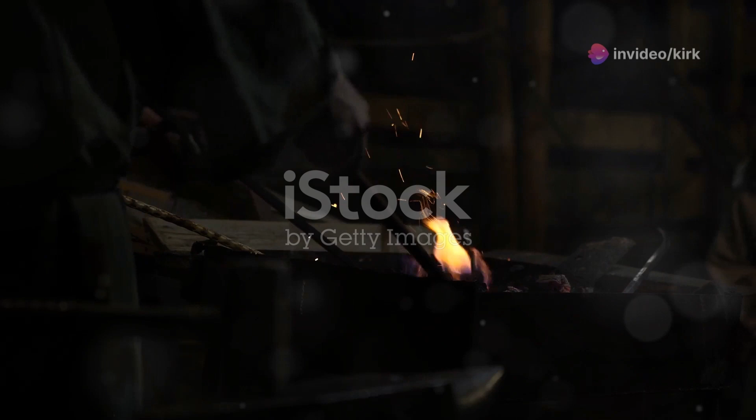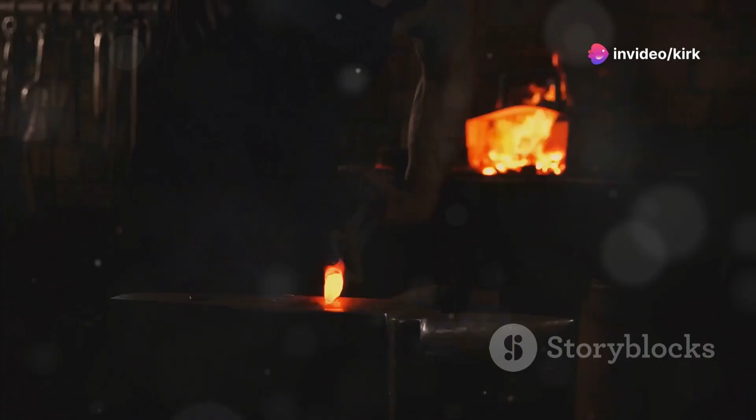Steel making has been pivotal for society as we know it today. It all started with the discovery of iron ore, which is a rock containing iron mixed with other minerals. During this time, there developed different ways to process the ore, typically involving high temperatures to melt and shape it into useful items.

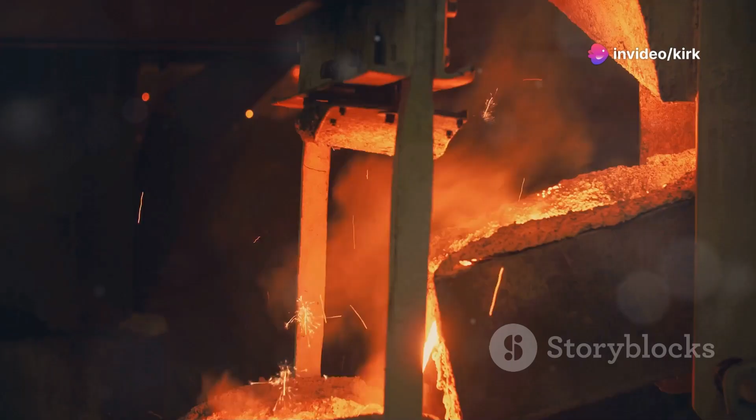The early forms of iron were hard and brittle. After experimentation and innovation, cultures learned that additives like carbon made iron a superior material known as steel. This was a game changer for the applications of steel.

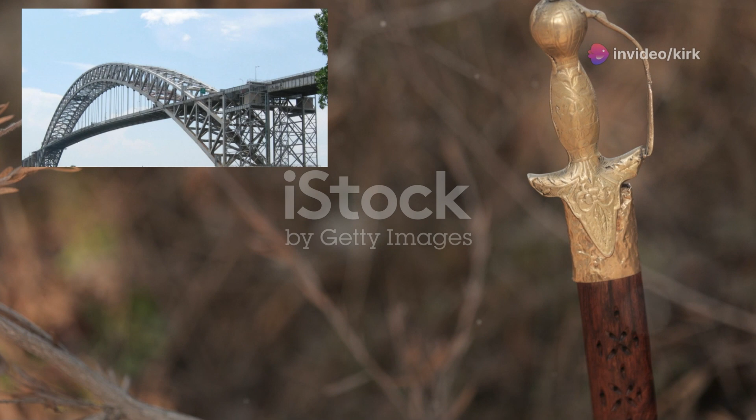Today, steel is one of the most used products around us. We use it for the majority of infrastructure around us, from railways, bridges, buildings, vehicles, and even military applications.

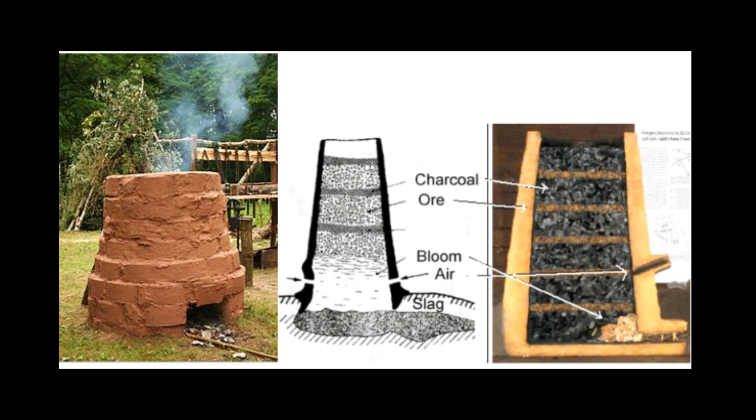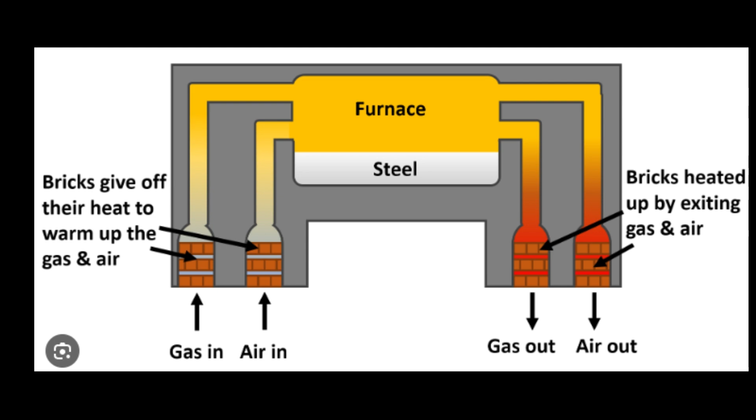Some of the techniques used to create steel were bloomeries, which used charcoal and iron ore in a chimney-like structure with heat; the Bessemer furnace, which was a similar process with more modernized equipment; and the open hearth furnace, which was more of a pit with air injected from below.

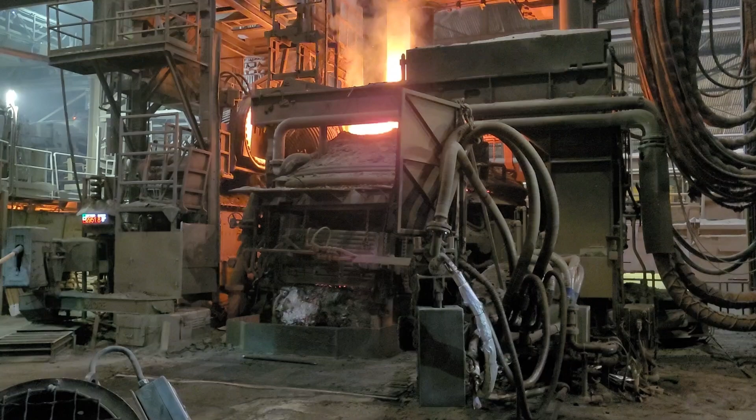The basic oxygen furnace is a big vessel with the ore and oxygen injected continuously. An electric arc furnace is what we use in present day. This technique uses mostly scrap, which is recycled and melted using electricity.

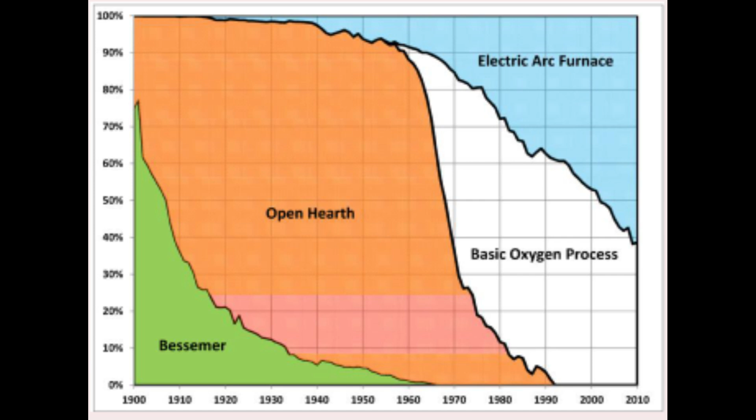Over the years, we see the techniques used to make steel have shifted as newer, more innovative techniques emerge. Today, the two main types are basic oxygen processes and the electric arc furnace. But there is always the need to improve steelmaking.

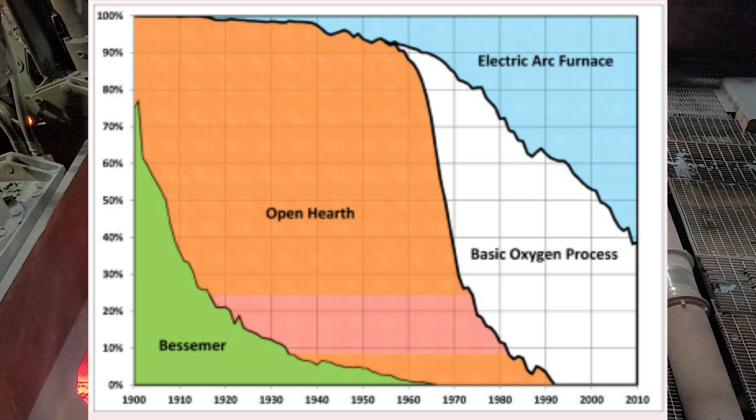The evolution of steelmaking has been driven by the need for higher efficiency, improved quality, and sustainable practices, leading to continuous innovations in furnace technology, process control, alloy development, and manufacturing methods.

The environmental aspect of these advancements must not be ignored. Steelmaking accounts for 9% of global greenhouse gas emissions. On top of this, 80 to 90% of the CO2 emissions from steelmaking come from the use of traditional blast furnaces.

In traditional steelmaking, iron ore is reduced in a blast furnace. The blast furnace takes an iron ore and uses carbon-based reductants like coal and coke to produce pig iron. This reaction also produces a lot of CO2.

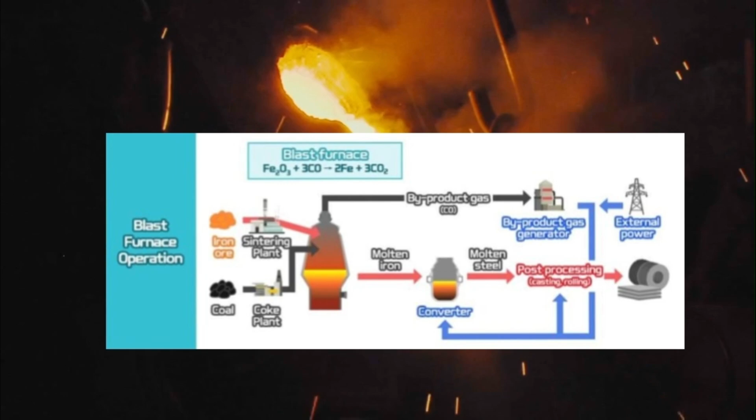Pig iron is then converted into crude steel in a basic oxygen furnace. Over 70% of the world's steel is produced using the blast furnace process.

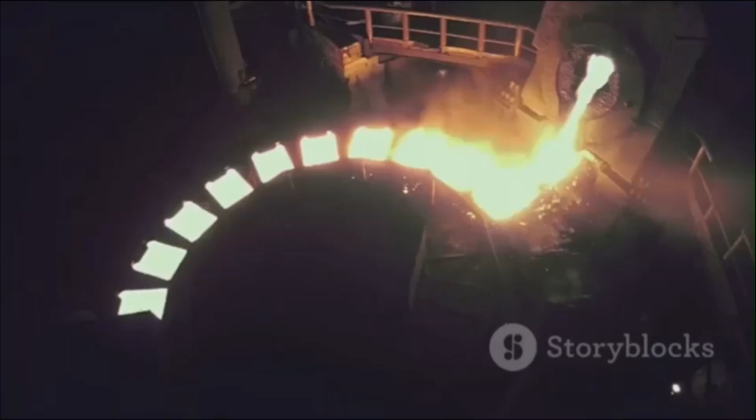Hydrogen-based steelmaking is a disruptive technology in the world of steel. With hydrogen production techniques having become commercially viable, the steel industry can take advantage of advancements in hydrogen-based direct reduction of iron. It is also poised to create the largest environmental benefit to the industry as it replaces the notorious blast furnaces.

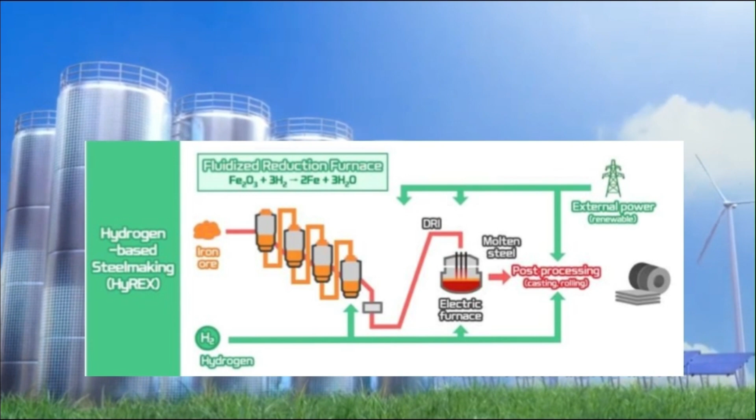The process is fundamentally different from traditional steelmaking. The blast furnace with coal and coke reductants is replaced by a direct reduction reactor, or shaft furnace, in which iron ore is reduced using hydrogen gas as a reductant. The byproduct of this chemical reaction is water instead of CO2.

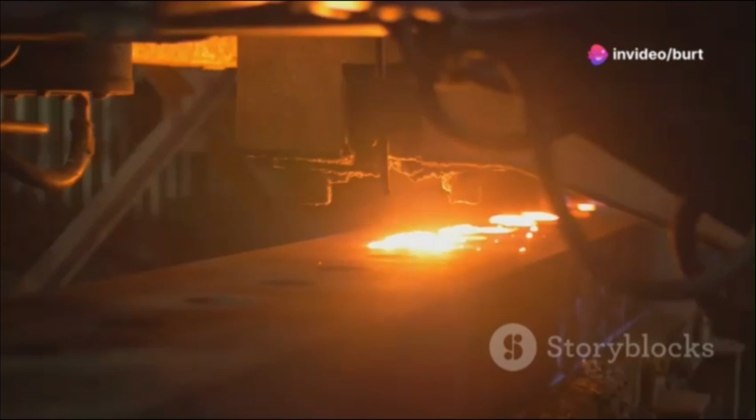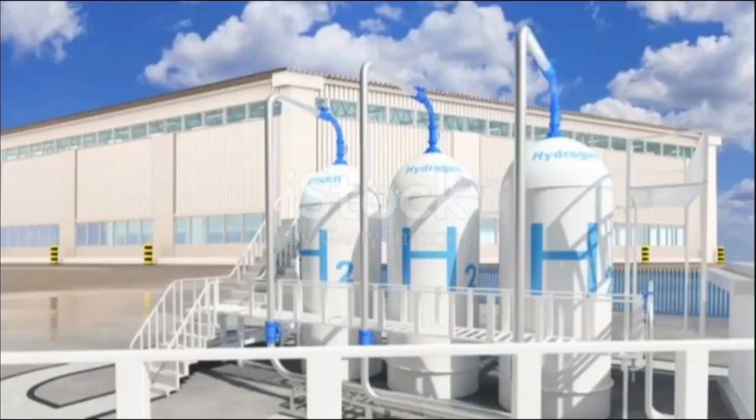Hydrogen-based steelmaking poses an immense environmental benefit but does not come without challenge. The environmental footprint increases if the process does not use green hydrogen, as in hydrogen made using renewable energy sources. The cost and availability of green hydrogen is currently an issue. Also, the required infrastructure changes to retrofit an existing steel mill with the technology are large.

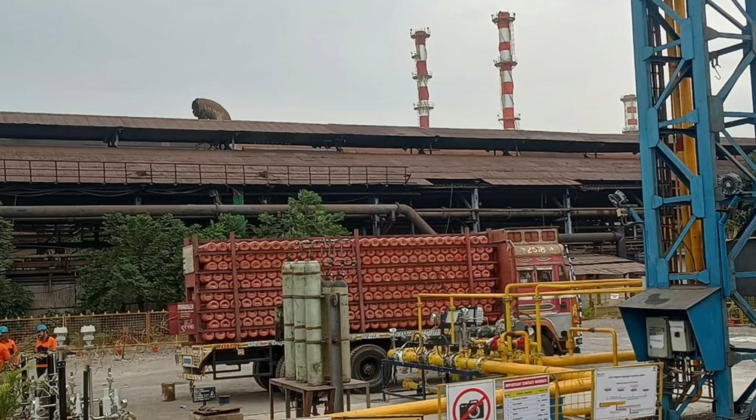Hydrogen-based steel production is in its infancy, but companies are developing and implementing it. The first one to mention is Tata Steel. Formed in 2022 and located at IJmuiden, Netherlands, Tata Steel is the first large-scale application of hydrogen in the steelmaking industry.

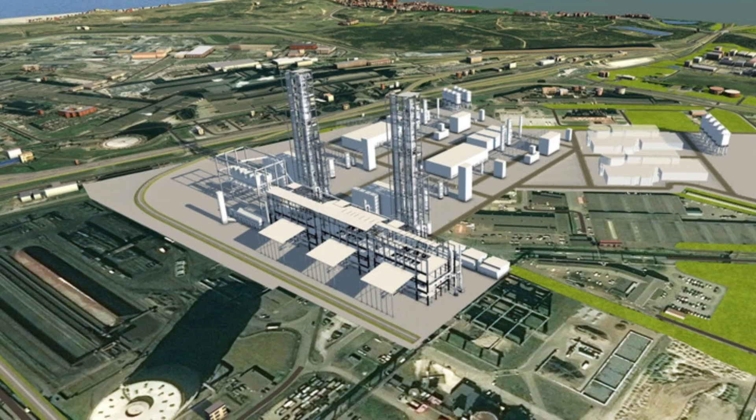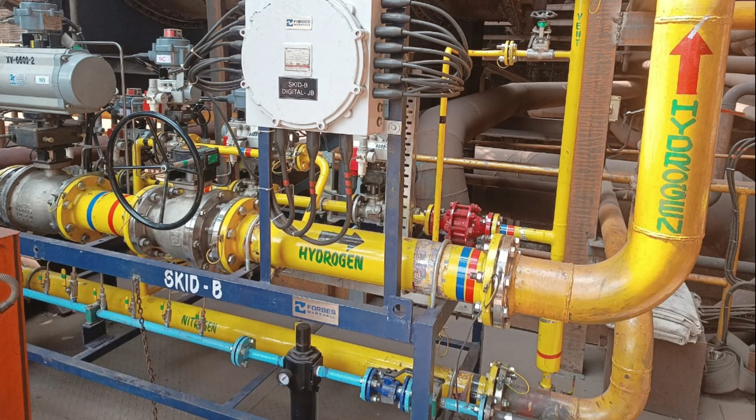With a goal to produce steel with zero carbon emissions by 2045 and emissions of 35 to 40% less CO2 before 2030, Tata Steel started its Green Steel Hydrogen project at IJmuiden Works. Tata Steel aims to convert its steelmaking facilities from coal-based to hydrogen-based by using DRI technology, starting with the construction of a new hydrogen plant at IJmuiden Works.

The new IJmuiden Works plant is expected to be operational by 2025 and produce up to 75,000 tons of hydrogen per year with zero carbon emissions upon completion.

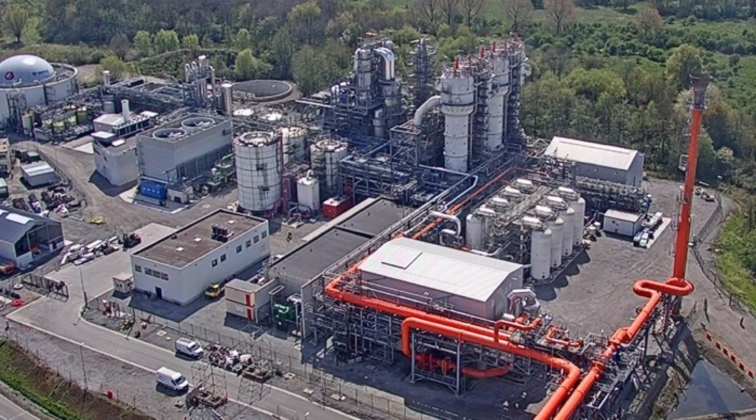ArcelorMittal is developing a new innovation project at its Hamburg site in Germany, aimed at the first industrial-scale production and use of DRI, made with 100% hydrogen as the reductant, with an annual production of 100,000 tons of steel.

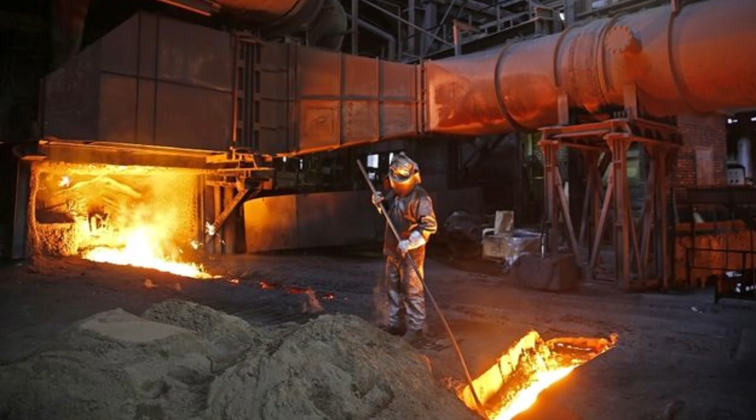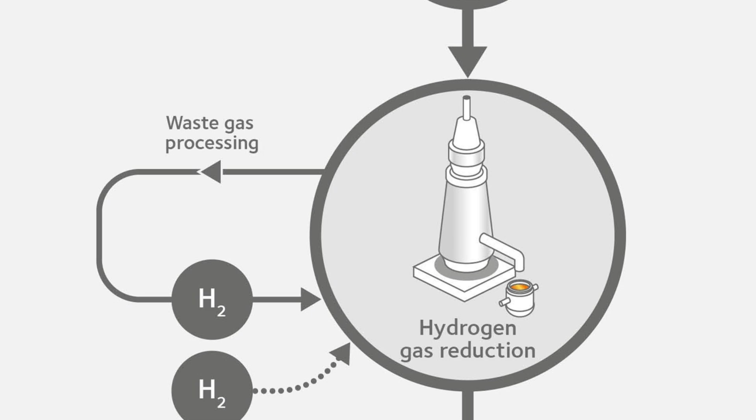The process of reducing iron ore with hydrogen will first be tested using gray hydrogen generated from gas separation. They aim to achieve the separation of H2 with a purity of more than 97% from the waste gas of the existing plant, using a process known as pressure swing adsorption.

H2 Green Steel, located in Stockholm, Sweden, has a target of producing 5 million tons of green steel annually in Boden by 2030 and reducing 0.3 billion tons of CO2 emissions by 2040, which is about 1% of total current annual man-made emissions. H2 Green Steel's technology uses green hydrogen produced through electrolysis using renewable energy sources.

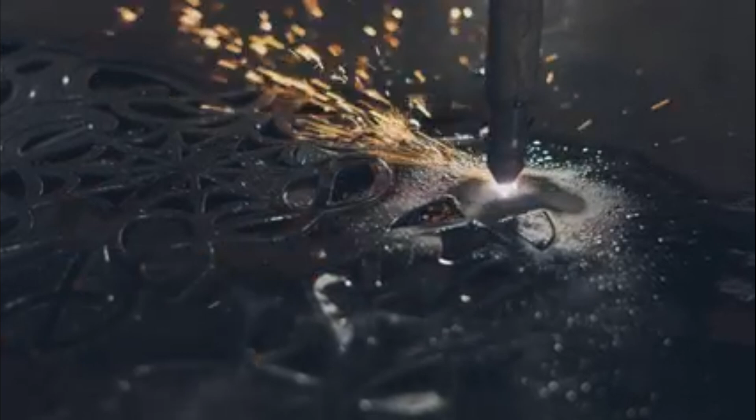This hydrogen is then used as a reducing agent in the direct reduction process, where iron ore is converted into iron without using carbon-intensive coke.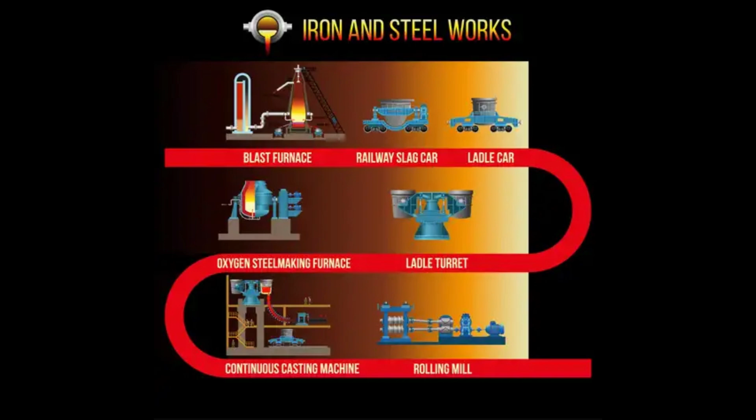HYBRIT, Hydrogen Breakthrough Iron-Making Technology, is a collaborative project involving Swedish companies SSAB, LKAB, and Vattenfall. The project aims to revolutionize the steel industry by replacing coking coal, traditionally needed for iron ore-based steelmaking, with fossil-free hydrogen. HYBRIT's technology involves using hydrogen produced from renewable energy sources through electrolysis.

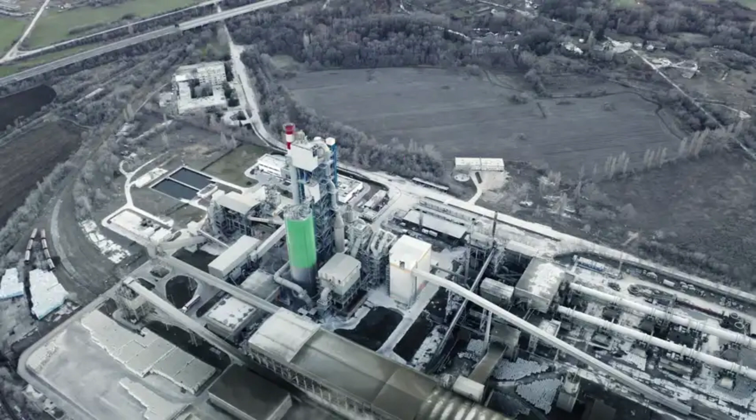Iron ore can be directly reduced using green hydrogen as a reducing agent. There are some other companies like voestalpine, JSW Steel, Helios, Electra, Carbon Re, Smart Steel, and GravitHy who are also trying to make the best implementation of green hydrogen steel manufacturing.

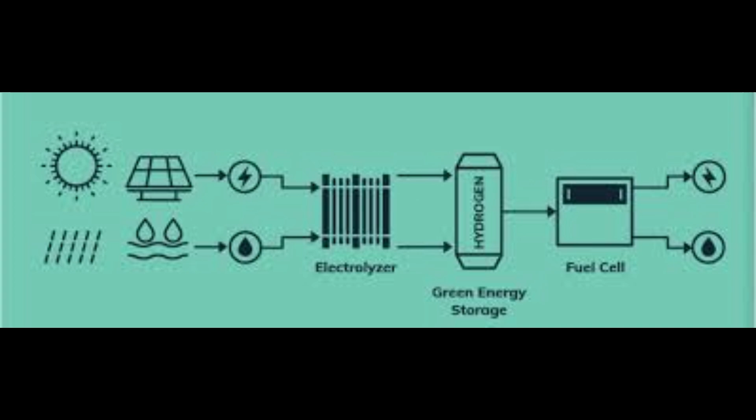Overall, the whole range of green hydrogen steel production is already on the horizon, and if these things come together, the steel industry might begin putting the pedal to the metal sooner rather than later.